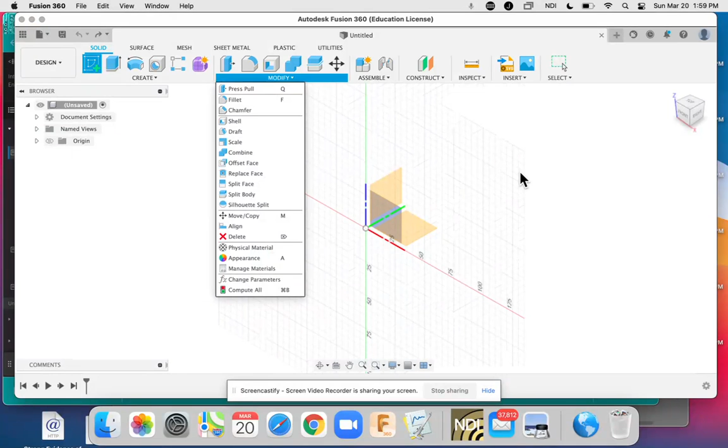And you'll notice there's loads of menu choices up here, but you're usually going to create a part by starting to create a sketch. And you'll see when you click on that, again, create and down to create a sketch, that's where we are. And you'll see the three planes, and you can pretty much just pick whatever one you want usually.

Okay, then you have lots of options here. Usually we're going to be working in this create menu, which draws shapes, and you can see it also makes patterns and mirrors, which we'll use later. And also there's a whole load of constraints when you want to keep things either equal or tangent or parallel or on the same line. So that's usually what we're going to use.

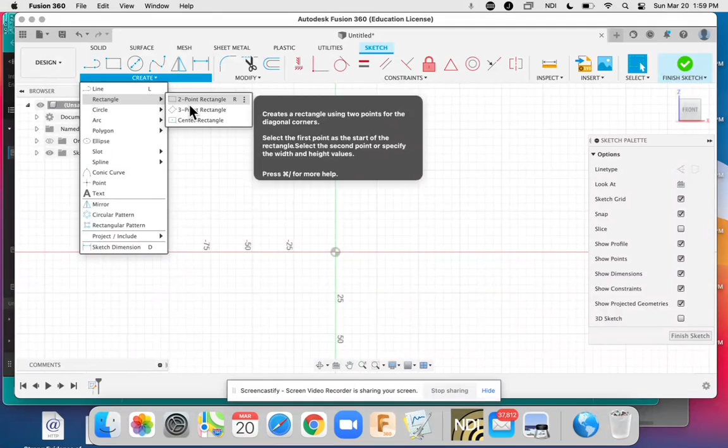But we're just going to go over here and draw a rectangle. You notice there are three different kinds of rectangles, and a lot of these have many different options. And you'll also notice when you hover over the options, it describes them. We're going to draw a center rectangle, and that's one where I pick the center and one corner. So I'm going to do that. I'm going to start on the origin, and there's my rectangle.

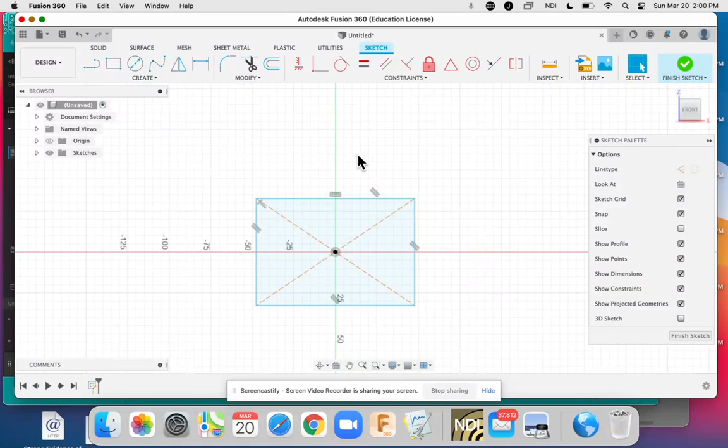And I could have set the sizes too before I clicked on it to finish it. Okay, I'm going to escape. I only want one rectangle. So I've got a 2D drawing. Okay, when I am finished my drawing and getting ready to 3D it, I've got to click finish sketch. Okay, and you'll see that comes in the 3D plane.

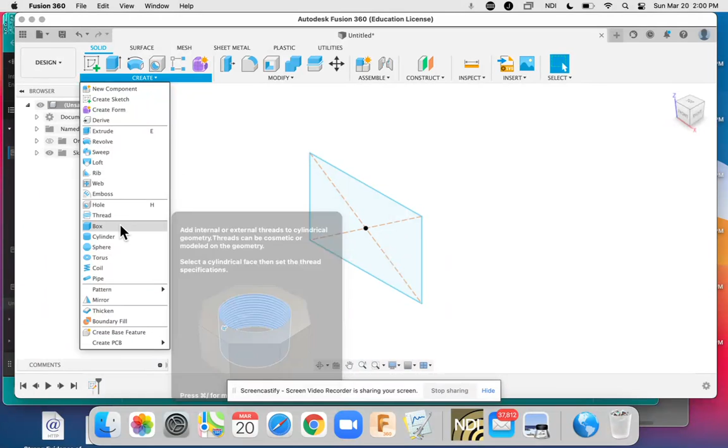Okay, most of the time we are going to be extruding, but we could also revolve or sweep or loft or rib, and you can actually hover over all these, and you can also just create the shapes. But usually we do a drawing, so you can hover over these, and I really recommend you do to find out what they do. But we're going to extrude.

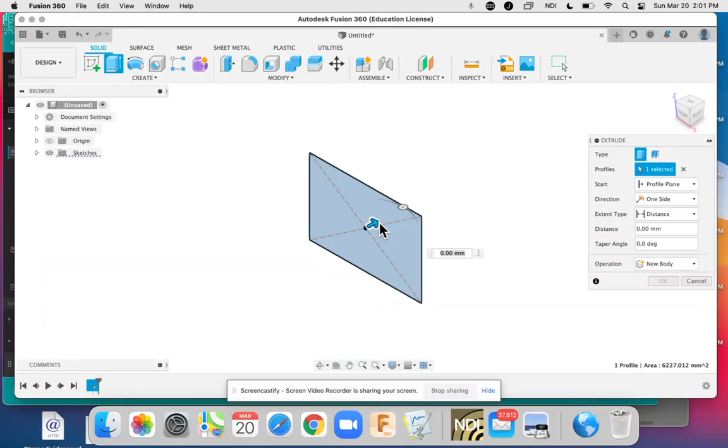Okay, you have to select a shape right here. It's blue, so we already did. And then you can tell, do you want one side, two sides? You want symmetric out each side? We're just going to do one side. Then it wants to know, okay, we're going to give it a distance, or to an object, we're going to do a distance, and then what the distance is. You can either type the distance in here, you can type the distance in here, or you can just make it that distance. And you see these two changed to 35 millimeters.

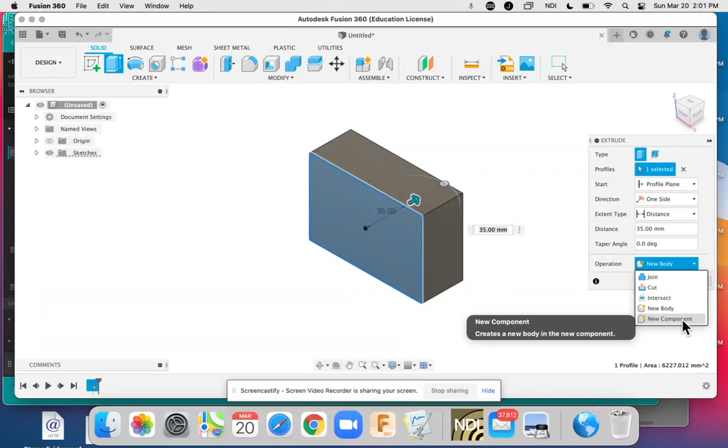There's also choices where if there's another part there, you can join it, or instead of making an object, you can make a cut into an object. Or, are you going to make a new body, or is this a whole new part? But we're just making a block. That's all there is. Okay. And now we can go up here and we can save it as a name. We'll call it block one, save, and you'll see the block one comes up here.

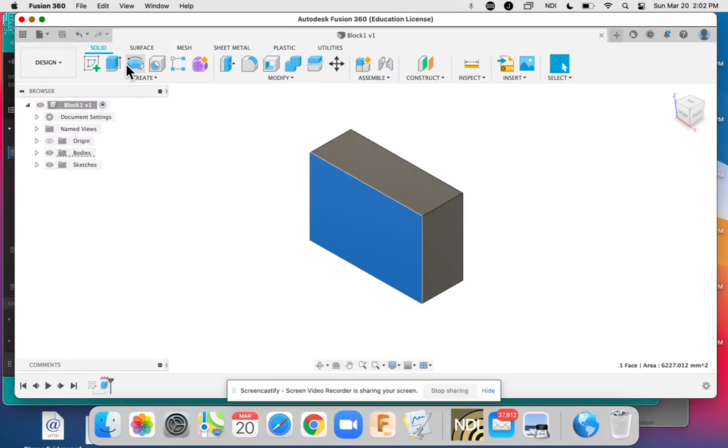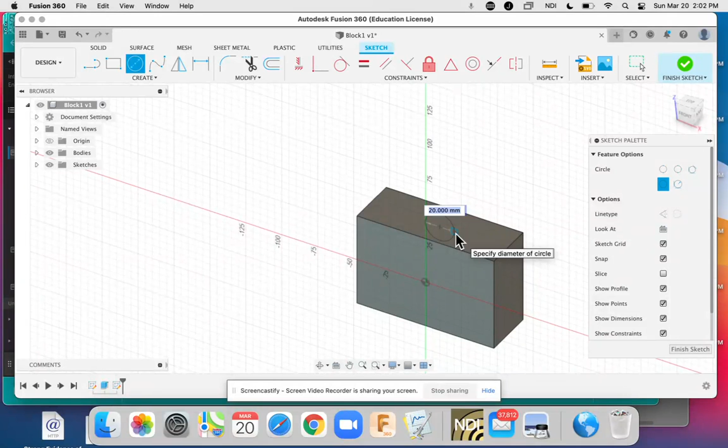Okay. If we wanted to put another shape on top of it, say I want to put a square or something out here, I'm going to create a sketch. It asks me where the plane is. Okay, I can take any side of my object. Actually, why don't we put one on this side? So I'm going to select this side to create my sketch. And then maybe I'll draw a circle here. Okay. And you could look flat on it too, but I could draw a circle. I can finish my sketch. Now I have a block with this funny circle on it.

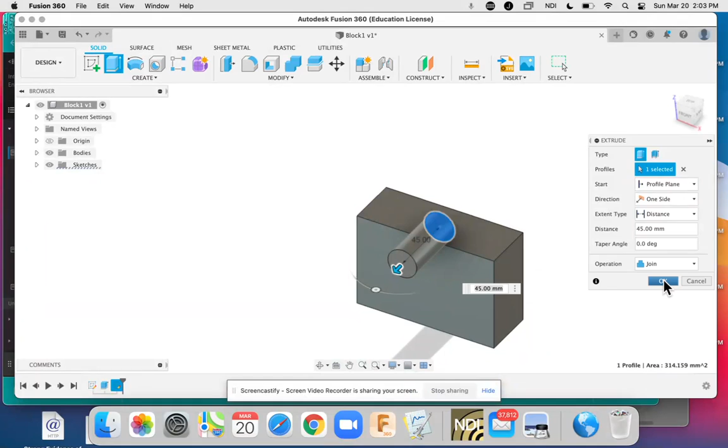And then I can go over here and do anything I want to do with it. I'm going to extrude it. I selected it, and I'm kind of like half in and half out of it. Oh, I think it was actually on top of it. And I'm going to connect those two, join them. Okay, so I just made this weird thing. Anyway, so I must not have selected the top. I must have selected this plane here.

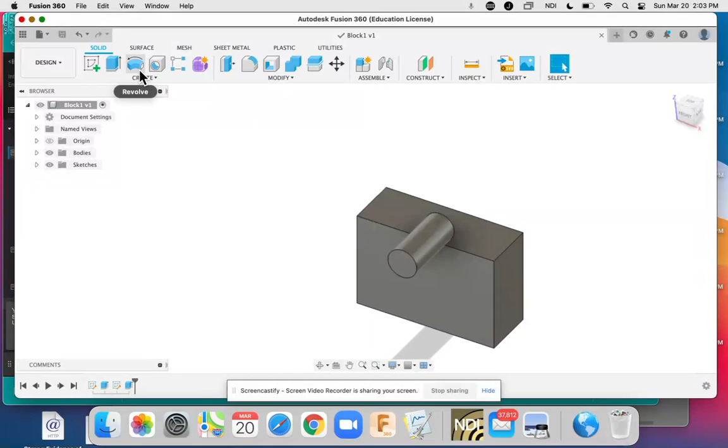And once again, I'm going to want to save. And I can save, call it version 2 or with cylinder if I want. Okay, and once I close that, since it's saved, it will show up over here, and I get this menu that shows me what I have by clicking on this Google waffle.